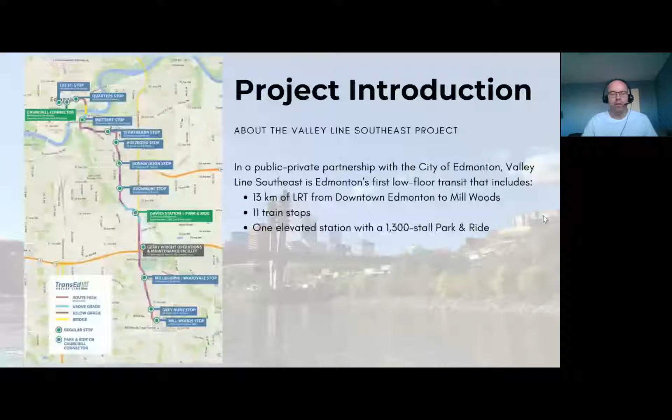Thanks, Isabel. You owe me. I think we had a deal. You were going to sing on this one, and I'm a little disappointed that you didn't do that. But we'll say that's okay, the last one. Yeah, maybe that's right. So tune in for the next one, folks.

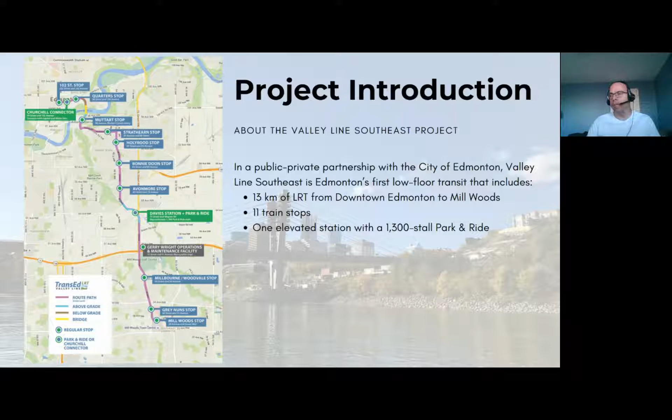A little overview of what the rest of this presentation will cover. I'm going to dive into more details on construction across the alignment, specifically in the River Valley area. Then I'll hand it over to Jan, who will take you through the train testing and commissioning aspect of the project—something that's new right now, as we're just launching into that stage.

I think you'll find it very interesting. It's not something many people are aware of, and we want you to leave this presentation with a good understanding of the level of detail it takes Jan and his team of electricians, professionals, and operators to test every single wire on this project—and there are a lot. Jan will talk about that.

Then he's going to hand it off to Isabel, who you heard a few moments ago. She might sing, so stick around—you never know, although I kind of doubt it. But if she does, maybe she'll sing the safety messages.

What we really want to leave you with today is some of the unique safety messages specific to this low floor system. She'll talk about the differences between the existing LRT system, which is high floor, and the new Valley Line low floor system integrated with the neighborhood.

After that, we'll hand it over to the ETS folks, who will talk about the bus network and the on-demand service. Then we'll get to all of your questions.

So I was going to dive into the construction update next—a bit more overview on the project. All 13 kilometers of steel rail has now been laid, completely across the project. We're at a stage now where the road work is virtually complete everywhere, with just a few isolated areas left to do.

Specific to the River Valley area, let's start up on the hill—that's the slide Isabel was just showing. This is the traction power substation, one of the more significant ones at the top of the hill, and it provides power that runs across the Tawatinâ Bridge, but also through the tunnel to our substation located downtown at the Churchill Connector.

If you're living in that neighborhood, you'll have seen a lot of activity there, especially in the last year or so. We're at a stage now where the equipment is going in, and we're making final connections and putting finishing touches on those systems within the building. We don't have an interior picture to show you, but if we did, it'd be full of cabinets, ducts and cable supports in the ceiling, and lots of wires running all over the place.

On the exterior, what we're showing here is an idea of what the landscaping will look like. All of these different circles and shapes represent various tree species, and they'll be planted around the structure to provide some level of screening that complements the fence that is already around there. There's also some additional fencing that'll be installed, all meant to effectively blend the TPSS, or traction power substation, into its surroundings.

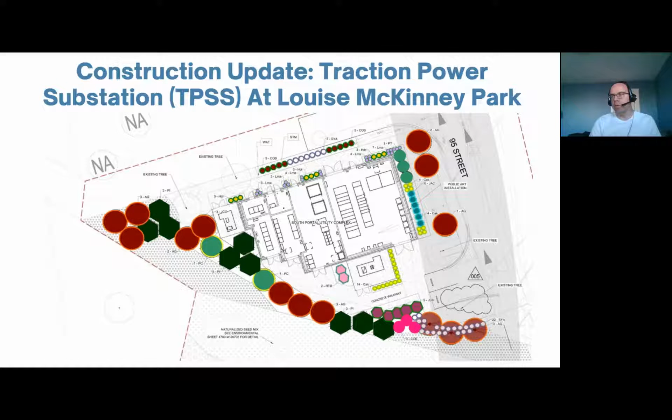You'll see those finishing works happening this spring and summer. The next slide we're going to show you is a bit more detail on the park restorations. Let's wait for it to switch here. Oh sorry, before I get there, I'm going to talk about the bridge, because that actually leads into the park restoration.

So Tawatinâ Bridge is a little different than what you see in the photos here, and the difference really being that the river berms have been removed. That is a significant step for us that we've been working on through the winter, and it allows us to launch right now, basically, as the spring is hitting and the ground is starting to thaw. It allows us to start doing the restoration of the parks on both sides.

So I'll talk about that in a sec. The other thing that you see in the photo here is some of the platforms around the towers—those have been removed. All of those cables are installed. Basically, the concrete work on this bridge is done. The rails across it, the overhead catenary system is across it, and we're now focusing on the underslung shared use pathway.

Now, if you're in the neighborhood, you've probably heard me talk about this in the past, and certainly would have seen some of the transit publications talking about that upcoming work in the schedule. What I can tell you right now is we are continuing to install the steel structure that slings—the underslung bridge that supports the walkway. That steel and walkway will be constructed through the next few months, really the bulk of the summer.

It's really important, and we want everyone in the neighborhood and the city, frankly, to know that even though the shared use path will be complete and ready for pedestrians, we won't have the connections on either side made at the same time. The reason for that is what I was talking about before—the berms coming out and now allowing us to begin our restoration of the parks on both sides.

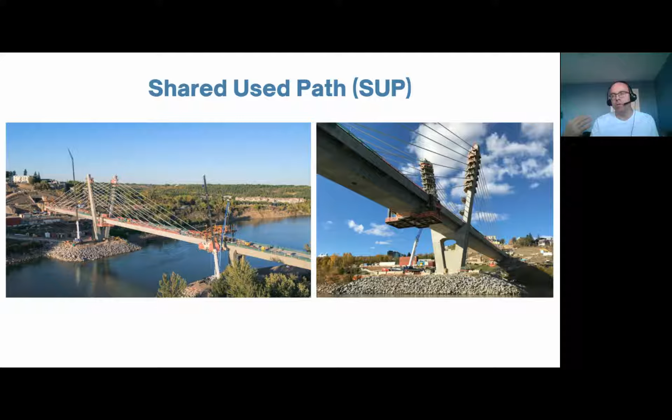So to do that requires removing our laydown yards, and that is actively going to be going on here very shortly. All of the trailers and the offices and the supplies that you see down there will be removed. We'll reshape the ground a little bit, start doing our landscaping, and effectively work our way down the slope. I'll show you a photo of that—actually, now you can probably go to it, Isabel.

As we work our way down the slope, we have a little bit of geotechnical type work to do, just to bring full stability to that slope, particularly on the north side. I could tell you it will be in a better, more stable condition than it was when we received it. So all of our design and activities are meant to enhance that stability, and that includes the landscaping installed on that slope.

So as we work our way out of the slope, do the geotechnical work, put in all the landscaping, we also put in those trail systems, and we reconnect the River Valley Trail system in and around this area on both the north and south sides. Once that work is done, we can actually make the connection to the new shared use path underneath the Tawatinâ Bridge. That work on both sides of the river will take all summer and into the fall, and we expect to be able to open it to pedestrians late in the fall.

I'm going to keep you hanging a little bit and talk more later in the presentation about when you can expect passenger service and the trains to begin running, and for you folks to jump on board.

But you're going to have to wait a little bit. I'm going to leave you a bit of a hanger, and we'll come to that at the very beginning of the Q&A session of the presentation.

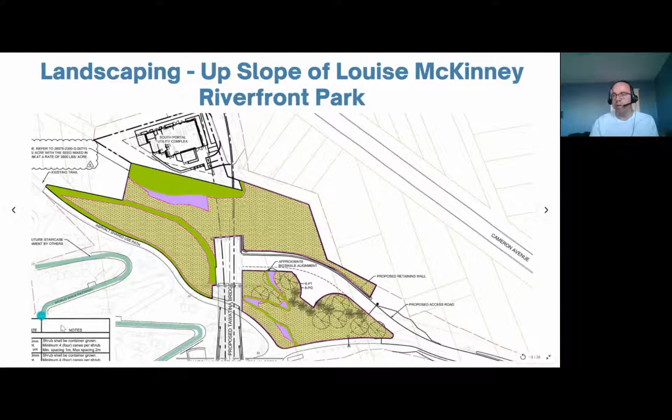The next diagram is a quick illustration. Henrietta Muir and Louise McKinney Park are both being reestablished and will look very similar to what they did prior to Trans-Ed coming on board. If you're familiar with that area pre-Trans-Ed, it'll look very much the same, with the same kind of concrete pathways and plaza established down there. It'll be a really beautiful place, just like it was before we came on site.

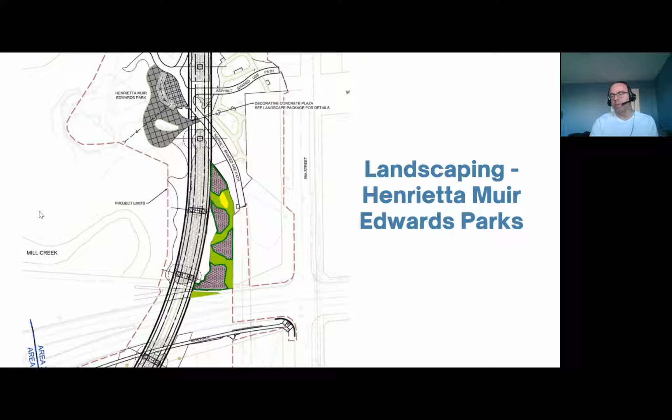Okay, you can go to the next one. I want to talk a little bit about the public art. If you've been across the entire alignment, you would have seen a lot of our stops that are basically complete. All that steel is up, the glass shelters are up, the sliding doors are in, and those shelters are heated, which is another unique feature of this Valley line.

And a lot of the art glass is installed. Now, on the Tawatinâ Bridge, it's a little bit different. What we have here is some art created by David Garneau. He asked for stories and memories from people in the neighborhood that he could incorporate into his artwork. What he has been creating and what will be installed is a series of 400 paintings that will run along the ceiling of the pedestrian walkway beneath the Tawatinâ Bridge. The shape of each panel reflects local plants, animals, and human-made things, and the content of each painting is informed by Métis and First Nations knowledge and material culture. The paintings will be arranged to suggest the flow and interconnectedness of people and the environment.

You can probably tell I'm reading that - I've taken that information directly from the Edmonton Arts Council website. I'd encourage you, if you have the chance, go onto that website. I think the link will be posted here shortly. Check out the art being installed across the entire 13 kilometers of the Valley line. I think you'll find it really interesting - it's going to bring a new level of beauty and thought-provoking elements along the alignment that we're excited to start installing. You'll see a lot of that go in, perhaps even get covered up as it goes in, just to protect it during construction works and from any vandalism. But by the time we open up the trains, all of that art will be fully visible. In the meantime, check out that website and you can get a good look at it and understand what's coming.

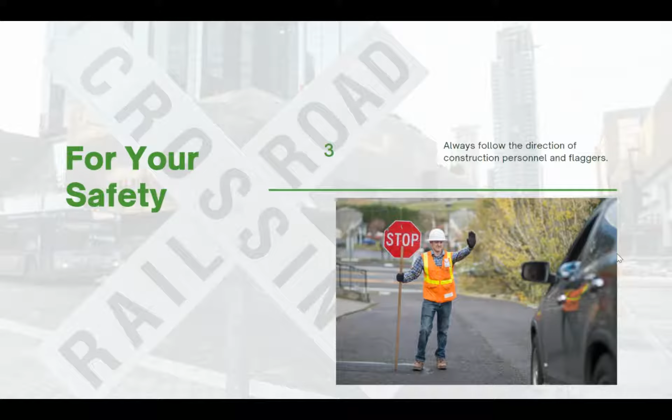The third one is to always follow the direction of construction personnel and flaggers. Our construction personnel and flaggers, when they have stop signs like in the image you can see, they're there for your safety, for the safety of their fellow crew, and for their own personal safety. When you see them holding a stop sign telling you that you can't go yet, it's because they have information about moving parts that you can't possibly see at that moment. We want to make sure all road users get to their destination safely, and that our crews get home to their families and friends safe as well. So any time you see our crews or construction personnel holding a sign in our active construction zones telling you to stop or go, please follow their direction at all possible times.

The fourth safety tip is to always follow traffic and pedestrian signs and signals. As you can see in the image, some of the pedestrian signs and signals have been put up but are not yet active. When you do see them active, we ask that you just follow the rules of the road as you've known them. So when you see traffic signals saying green to go, no left turns, on red, we kindly ask that you follow that road signage and the signals and what they're permitting you to do. Stop signs and no left turn signs, all of these are there for your safety.

So we ask the public, whether you're on an e-scooter, cycling on your bicycle, walking as a pedestrian, driving, or on your motorbike, to always follow those traffic and pedestrian signs and signals that you see.

The fifth tip is to be aware that coming into contact with live overhead wires can lead to serious injury or death, and to keep all high-reaching devices such as ladders, outdoor banner light installation poles, drones, and remote-controlled planes away from the energized overhead wires. Jan and Dallas touched on this as well. The overhead wires are energized at different areas along the entire 13-kilometer alignment. We ask that the public always assume these overhead wires are energized and live, because if you come into contact with them, there will be serious injury or death.

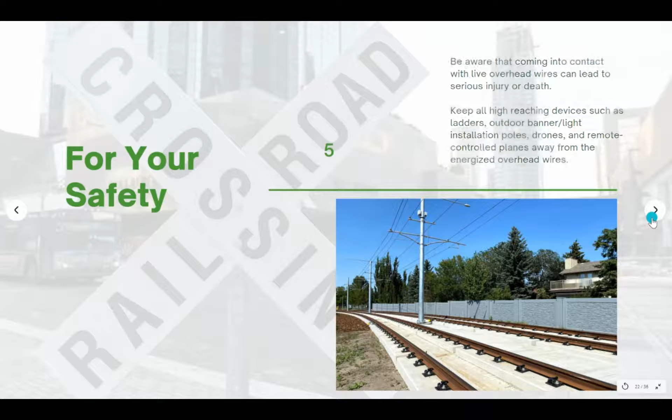Hi, I'm Basma. I'm with Edmonton Transit. I'll be here to introduce you to the new bus routes and on-demand transit that are launching on April 25th.

So just an overview of the new bus network. It has two elements: the new bus routes, and the on-demand transit shuttle, which complements the regular bus service and brings people to the regular bus routes.

The local route network is designed to connect with the Valley Line in the southeast and to other areas. Frequent Route 4 will run along Whyte Avenue from Capilano to West Edmonton Mall, similar to what it does today.

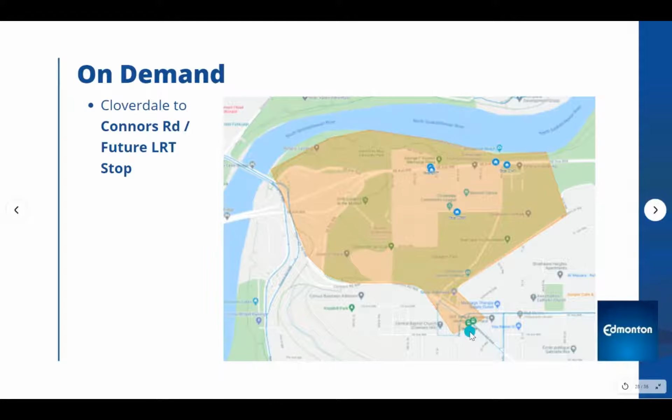You can find more information on the website. All the online trip planning tools are available, Google Maps or the Transit app. You can book a trip and just change the date to sometime after April 25th to see what a trip would look like. The Edmonton On Demand Transit app should be launching this week, and you can download it — it's quite user-friendly.

All the traditional route brochures and schedules are on the website, along with interactive maps showing the bus network and on-demand stops that we shared today. There are overview guides that explain more about the bus network, and some educational videos showing highlights and how to book a trip on the on-demand transit app.

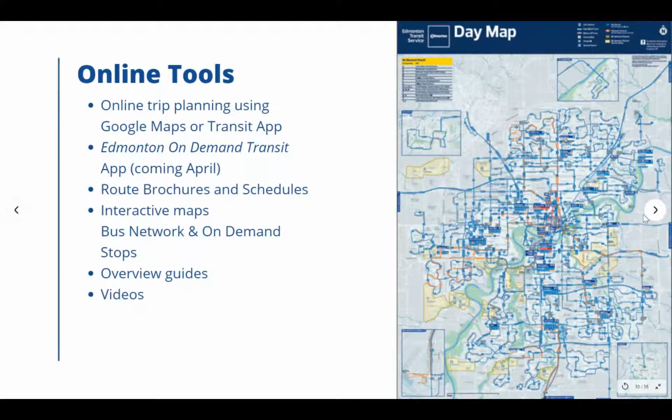So after the launch, what happens after April 25th? We know this will take time to adjust, and the network is not set in stone. It is flexible, and we will monitor the performance, the ridership, the on-time performance, and the schedule data, and plan to revise the network within about a year.

Customer feedback is also very important to see how things are going. The on-demand transit network is actually a little bit more flexible than the bus network, because the bus network requires more fixed schedules, whereas the on-demand is more flexible.

And here's the links to the website — just the city website, edmonton.ca/new bus routes, and on-demand transit for more information.

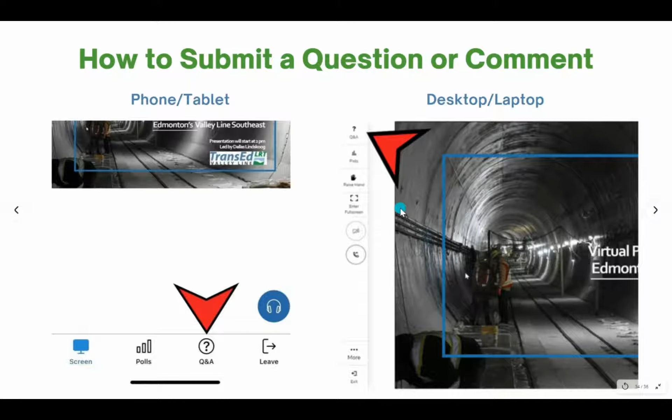So let's dive in. The first question is probably what everyone on the call is wondering: when can we ride these trains that we have seen? Dallas, this one's for you.

I promised I'd come back to that at the end here, and we get that question all the time — I think I have to answer it at least a couple times a week. It's a perfectly fair question to be asking, especially at this stage of the project. It's coming together, as you can tell from what we've been showing you.

For those who maybe joined late, just a reminder that TransEd is not here just to build the project — we're here to operate the Valley Line for the next 30 years as well. So it's really important to us that when we do launch into passenger service and welcome people aboard, we're set up for complete success: no interruptions, full service, running just as it was intended to run. A lot of that has to do with the testing and commissioning that Jan was talking about, and all the many, many tests that have to be run on the system prior to welcoming passengers, which will take us the bulk of this year.

I did lay down some hints earlier when talking about the work in the River Valley, and it's important to understand that's going to take all summer long and into the fall as well. So when you combine the last of the construction activities, the last of the paving — which can really only occur in the summer — and the last of the landscaping, it will take all of the summer and the fall to do that, plus the commissioning.

So what we are targeting right now, and we can tell you, is that we are targeting an opening before the end of 2021 — so before the end of this year.

Yes, most probably somebody had studied this. Bear in mind that this project's initial primary study started 10 years ago, and we were not where we are now with battery and fuel cell technology. That being said, it's a very interesting topic. I'm passionate about those battery trains, having been involved in some projects in Europe using them. They are mostly used outside of cities because of the cost of bringing energization to rural areas. Right now it's still more cost efficient to have a catenary system in urban areas.

Something to bear in mind as well is that here we're using a low floor system. When you use a low floor system, most of your equipment is on the roof of your train. So if we use battery, we would need to put those batteries on top of the train, and that has a very important impact on the balance of the train because those batteries are heavy. That's one of the main constraints we have with low floor and battery, trying to have the best of both worlds. But right now it wouldn't be that cost efficient. Once the cost of installation of the catenary system is done, it wouldn't be a cost efficient decision to switch to any other type of battery at this stage. Maybe for the future, but we are not there yet with systems where battery are efficient.